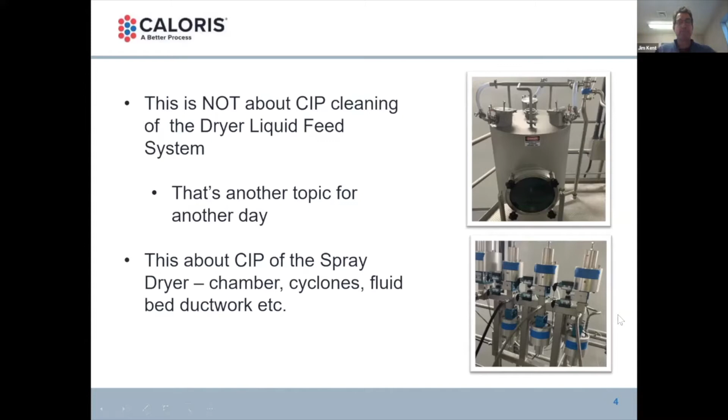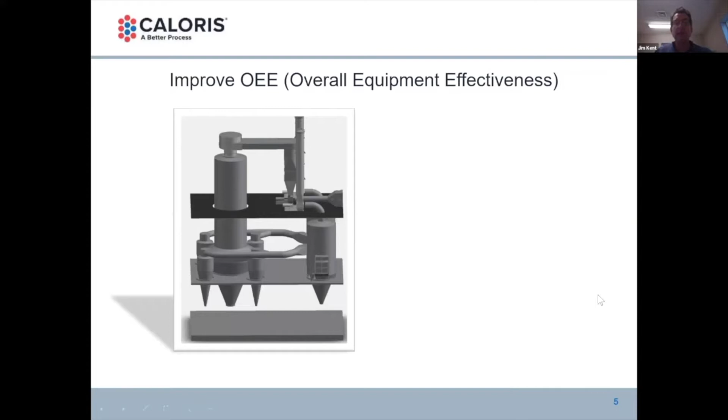All right, and the modern measurement of operational efficiency is OEE. So what are we trying to do? We're trying to improve OEE, overall equipment effectiveness. Missy, go ahead and click twice. Thank you. The two areas we're going to attack are: what can you do while you're running the dryer? What can you do between CIPs to make sure you're getting less buildup, so you don't need to CIP as frequently? And then, once you are in CIP, how can you shorten that? Missy, go ahead.

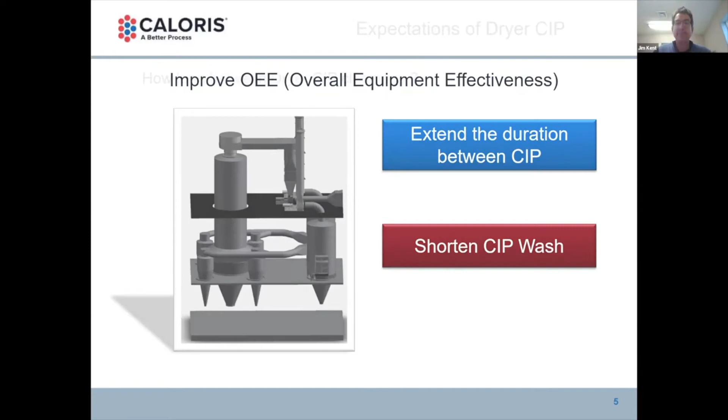So how long between dryer CIP cleanings? What can be your expectations of how long you could actually get? I looked at this in three ways, because different powders have different outcomes, different needs. So Missy, go ahead, click 3 times. I can just run through what comes here. I looked at it from a standpoint of commodity products. If you're running the same thing all the time, maybe a dairy product like a whey protein or a skim milk, maybe a plant protein, where you're running the same or a very narrow band of products all the time.

We might say a good target is 3 months. We're seeing a lot of spray dryers run maybe a year between CIPs. So if you're trying to set yourself a target to improve towards, we are seeing people maybe CIPing a commodity dryer every month, and they could try to extend to 3. We're seeing some that are getting to that 3-month edge, and they could strive to go for a year. What I'm trying to tell you is that the 90-day target, the year-long target is out there.

That is being achieved. And when you do that, what would be a reasonable duration for the CIP? How long would it take you from off product to on product again? If you're reaching that long target of a year, it's not unreasonable to think, if the CIP is working well, the machinery is working well, and the cleaning is effective, to get turned around in 12 to 36 hours.

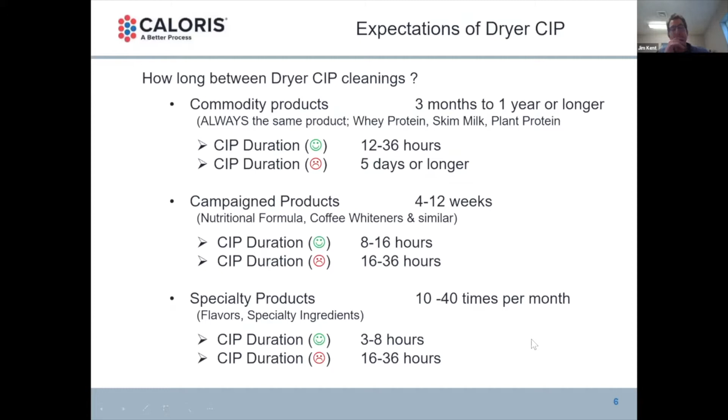Thank you. Missy, go on. All right, and click the next. And click the next, please.

All right. So when we're talking about OEE, overall equipment effectiveness, and we're trying to extend the duration of CIP, let's talk in terms of a commodity type product like we're showing. Let's say you're running 30 days, you're trying to extend to 60 days. And in that same regime, we want to shorten the wash. Let's say you're running 16 hours, we want to get it down to 8. What does that mean overall? Where does the opportunity lie in that? So Missy, one more click.

Well, what that means is you're right now 12 CIPs a year on a 30-day interval, 16 hours per CIP is 192 hours for CIP. You go from 30 days to 60 days and 16 hours down to 8 hours. Now you've reduced from 192 to 48 hours. So you've gained 140 something hours a year, nearly a week's worth of running hours or 2% of your year.

What's that worth to you? That's a rhetorical question only you can answer based on your product's value and your plant's economics. But what would you do? What would you spend or invest in equipment or training to gain an extra 140 hours of operating time per year? So next slide, please.

Next 2 clicks, please.

So now on the other end of the spectrum, like the specialty products. If you need to wash, you just need to wash. So if you were washing 10 times per month on a specialty like a flavors product, you're still going to wash 10 times per month. But what if you could reduce that? What if it was taking you 12 hours and now it takes you 6?

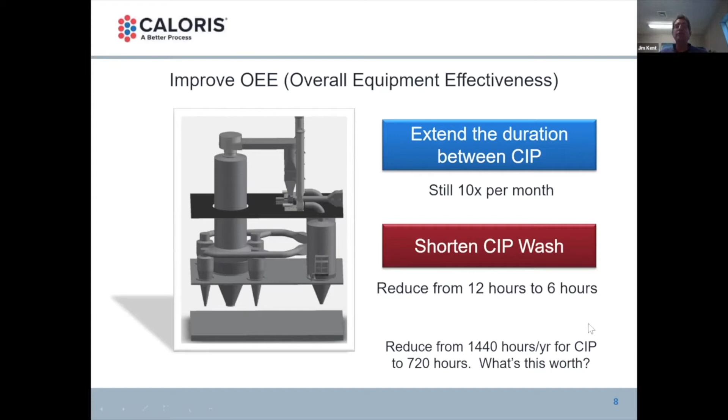Next click. So again, a little bit of my answer to that rhetorical question, because I don't know your exact operation, but if you're in that commodities arena and you're running 5,000 pounds an hour and you're getting that 140 extra hours per year because you've taken those steps, $1 a pound, is it profit? Is it net margin? Well, I think if you get a few extra pounds, most of that goes to the bottom line. Your overheads for your plant are covered.

So click, please. That adds up. 5,000 times $1 a pound times 140 hours a year, $700,000. That's the potential value, simply put, in capturing that extra time. And again, the question is, what would you do in procedures or procedure preparation or training or equipment to realize that extra operational potential? Next 2 clicks.

Same on the other end of the spectrum. If you were in that sort of specialty products, maybe it's a smaller dryer, 500 pounds per hour, but now you're talking about getting 700 hours per year. Now my $1 per pound is maybe a little conservative. These flavor products might have a net added value of $5 a pound or something like that. But at a conservative $1 a pound, again, $350,000 per year potentially captured in extra throughput of the plant, because you've improved the CIP.

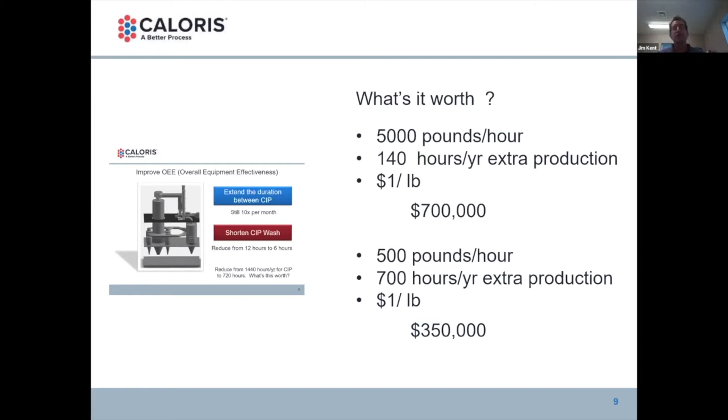So next slide, please. So again, one more or a couple more slides on background. 4 clicks total. One more. There we go. We'll hold on that.

Thank you. So why clean the dryer? There's actually 4 drivers in my view that sort of aggregate to be the reasons you clean your spray dryer. One big view on product quality, but different reasons for your finished product quality. The first could be discolored particles or burnt specks. If you're getting to that long end of the time, 3 months, 6 months, a year, your product in the chamber is going to be exposed to temperature and it might discolor. So that product quality visually with burnt specks might be a driver to clean your dryer.

Again, the flavors folks, the ingredients folks who are batching things, there might be product segregation issues, product separation, so colors or flavors. And nowadays, very strong view on allergen classes. In the US, we have 8 allergen classes. The EU defines 14 different classes of allergens. Could be a driver to do these CIPs so you get full segregation between your products. Obviously, biological contamination could be another one.

And spray dryer safety. So chamber buildup, whether it's burnt on, showing you hot spots, or you have layers of buildup, which could, in certain cases, depending on your product characteristics, auto-ignite and start a fire. We want to keep an eye on the chamber buildup, or cyclone buildup or other vessel buildup could be a driver to cause you to do a CIP. But these to me are sort of the drivers of why we need to clean and what makes that decision.

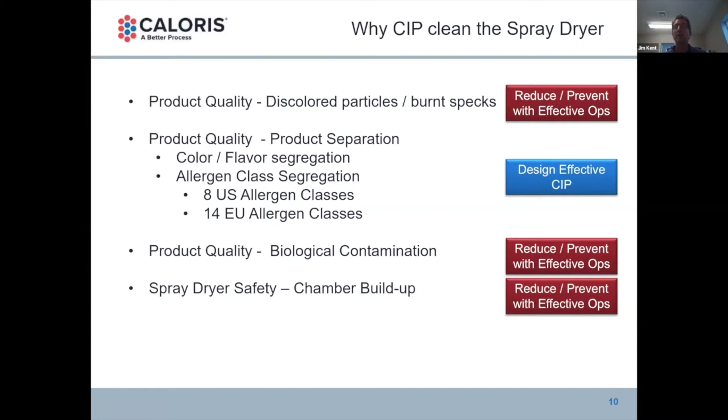Quick look, I just put it in here for reference, the 8 US allergen classes. A quick look up on the internet finds you these again, but these are the drivers for a lot of things these days that have to do with CIP, as these batched formulations with mixes of dairies and glutens and nuts become more prevalent. So next slide. So into the meat of this, what are common sense things we can do to extend the duration between dryer CIPs? Next slide.

All right. So one of the product quality things I mentioned previously was the buildup on the dryer, leading to burnt specks or biological contamination or safety concerns. What's causing those? How can we minimize them? Well, unsteady or irregular startups or shutdowns. So turning your dryer on, going from idle and spraying no product to spraying product, and then going from spraying product to shut down, so spraying no product.

That would be, I think, the single biggest potential time to create an upset condition that could wet the chamber down or heat the chamber up, dry it out, causing burnt specks, wetting it down, causing buildup. If the startup and shutdown can be done in the most repeatable way and the most controlled way, you have the easiest startup and therefore the least buildup, the least problems. So if we have unsteady irregular startups and shutdowns, I've put the little red unhappy face there.

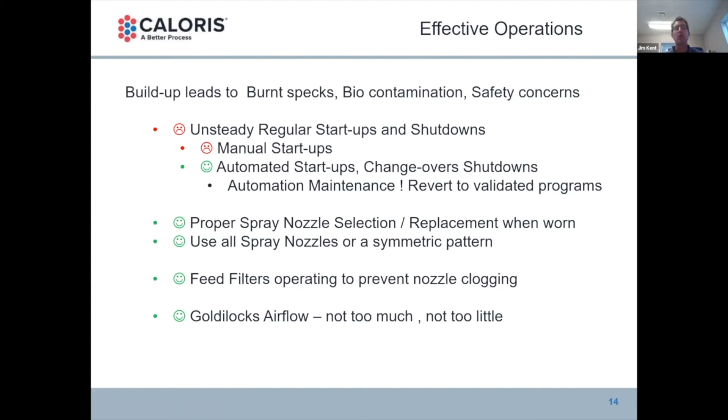Another topic I'll cover in another slide is, I'll call it Goldilocks airflow. Your dryer and its air disperser were designed for a certain airflow. Not too much, not too little. We can adjust temperatures, but we shouldn't be adjusting airflow rates. We want to maintain the Goldilocks airflow.

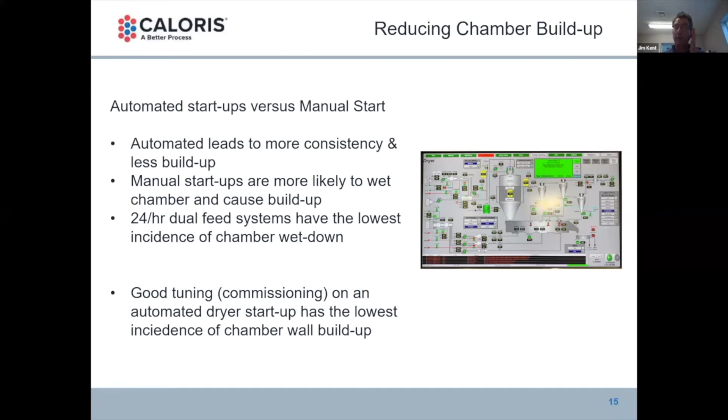I would say, as I said before, one of the more important things is that symmetric nozzle lance pattern. Let's use an example where you have 6 nozzle lances in there. If it's in startup and you're working your way, or today maybe you're only running 5 because you've got light solids or something like that.

One day is okay. But if you're consistently only running 5 when you have 6, it's time to consider whether you should be running a smaller nozzle orifice so you can run 6 and get the symmetric pattern that gives you even drying, even airflow, and eliminates the hot spots and the cold spots in your dryer.

As well, I've walked into dryers, and this is just fine, where they'll put 3 nozzle lances on one size orifice and 3 nozzle lances on another size orifice, so they can get a bit of a balance between 2 orifice sizes, perhaps. Well, you want to put them around evenly, large, small, large, small, large, small, as opposed to putting 3 large on one side and 3 small on the other.

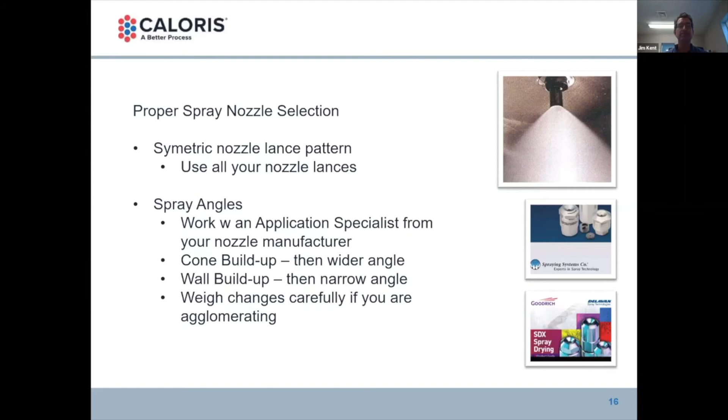Generally, if you have wall buildup, especially high in the chamber, then maybe you could do with a little bit narrower nozzle angle. Your swirl chamber inside of your nozzle would change in both those cases. But weigh these changes carefully. Your customers have gotten used to your product. Maybe it's an agglomerated product, whatever it is. Weigh the changes you make carefully. Do it scientifically. Note the changes you're making and then measure the product afterwards, measure the outcomes. So, Missy, next slide, please.

A couple of minutes on your air disperser. Any dryer manufacturer, whether that's Caloris or any of the others out there, has designed your air disperser to match the design airflow of your dryer. There is a velocity in the throat where the air enters the drying chamber around the nozzles. It's always best to be running at the design airflow, plus minus 10%. If you're running at that design airflow, you're going to get a correct differential pressure, and you're going to get a correct air distribution, a nice even airflow downward.

In my experience walking into some plants, they have a product, maybe they need less throughput on that product, and they'll reduce the airflow. Please don't reduce your dryer airflows to reduce your product throughput. Reduce your inlet temperature, and then balance your outlet temperature to get the product moisture. If you need to reduce throughput, don't do it with airflow.

The same to the other side. Be very careful about increasing airflows to increase throughput. It may be possible. It should be done by a specialist. One should always be concerned about spray dryer safety. But too much airflow could drive the product down deeper into the cone. You'll have a higher velocity. It'll push it down further into the cone and could increase your buildup. Your air disperser and your airflow were chosen by your dryer manufacturer for a reason.

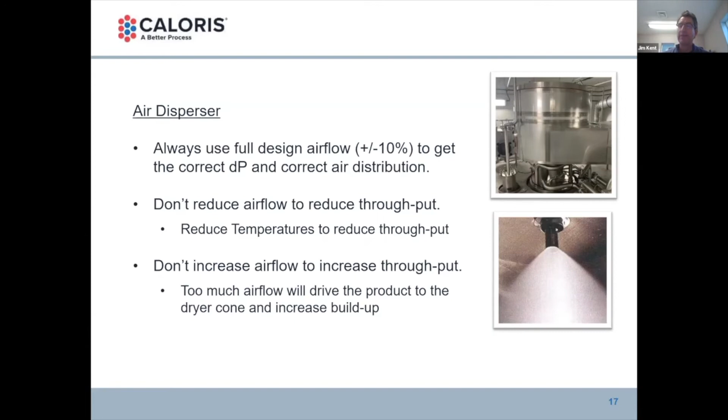All right, so that's some thoughts, not a comprehensive list of everything you can do to prevent buildup and extend the time between your CIPs, but some ideas and some areas that we see getting less attention than they should. So the last bit of this is shortening the dryer CIPs themselves. So let's go on to the next slide.

All right, the easy things. I feel bad putting this in here, but we want to make sure we say everything. If there's someone who this is new for, then I'm glad I've put this in here. So CIP is really, I'm thinking, from the minute you shut off your feed pumps and you stop spraying in your spray dryer, you're off product. You set your dryer up for CIP, you make some changeovers, then you do the CIP wash, then you change it back and set it up for production, and then you warm everything up, dry it out, and put it in production.

It's a little bit like that old metaphor, not fixing the roof of the house while it's raining. A lot of the things you can do to make for a good CIP can be done while you're running. You're going to do a CIP in 2 days or in 5 days, so make sure you have all those tools, all the swing connections, key pieces that you're going to need. And if it's been 3 months or a year since your last CIP, finding those tools, finding those pieces, and making sure everybody, including anybody hired since, understands the objective is sometimes forgotten in the heat of the moment of trying to get production through.

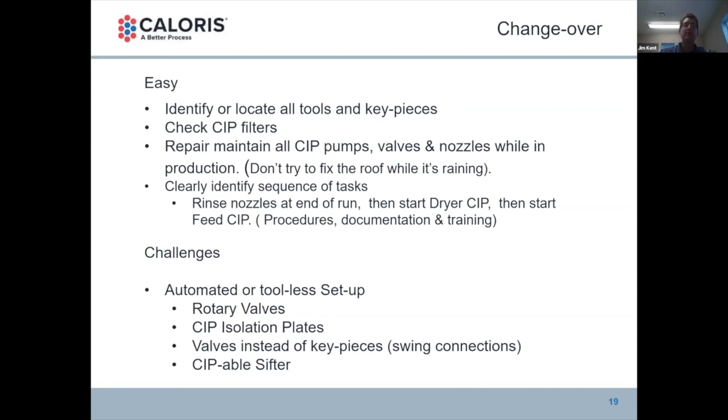Missy, go ahead. Thank you.

We just think at Caloris, with our experience with spray dryers, that there's a lot of time spent on manual installation of spray balls where there could be automatic deployment, and tens of hours per year could be recaptured for operation. It's a capital cost once, but it's a time cost with each CIP.

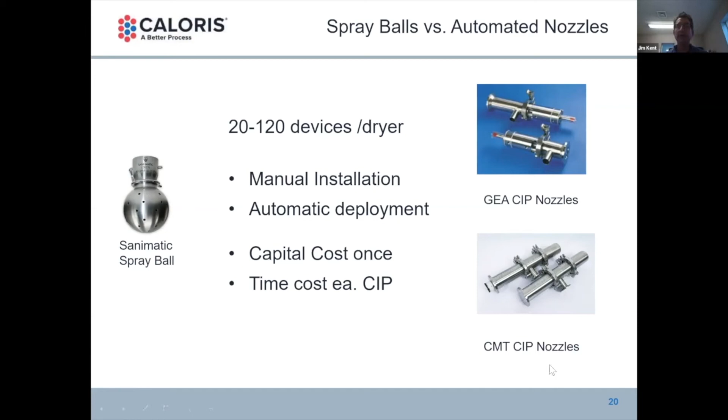Again, another area in the CIP kitchen: lots of spray dryers out there, especially the ones that CIP infrequently, where it makes sense to have a one-tank CIP system. So you fill the tank and you heat it up and you do a rinse, and then that's emptied, and then you fill it up again, and that takes some time, and then you heat it up again, and that takes another 30 minutes, and then you wash and you add some chemicals and you empty it out when that's done, and you go through your many cycles, losing a fair amount of time to filling, heating, and emptying. Extra hours are added in.

Now, if you only CIP once a year or once every 3 months, that's fine, but there's a lot of repurposed dryers. A dryer that was maybe a dairy dryer designed originally to CIP every 3 months, and now it's repurposed for something else. The one-tank CIP system is then a legacy item, and there are better ways to do it. Would adding a second tank save hours of filling and heating time?

The most modern way is a 4-tank CIP system, so that you might have a pre-rinse tank, a caustic wash tank, an acid wash tank, and a final rinse tank. If you have a site with multiple dryers, you could be washing multiple dryers with no queuing, having a 4-tank CIP system like this. If you're in the type of plant we talked about earlier, a flavors plant, where you're looking at turning around in the very fastest time possible, you're really trying to achieve that 4-hour CIP turnaround time from off product to on product, well, then this is an absolute necessity. High capital cost, but very much time savings.

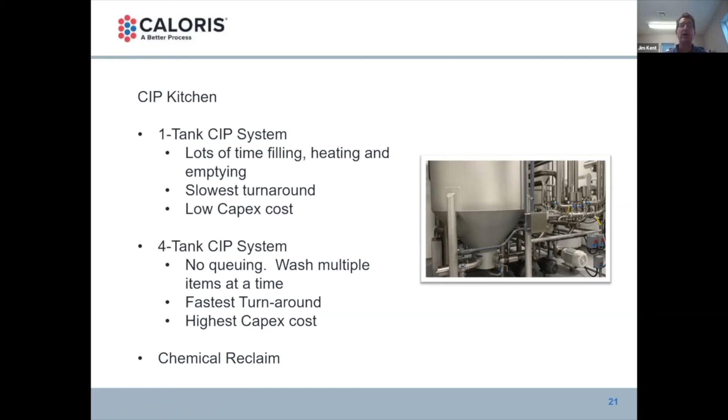Another area that can be looked at as one washes more often, as one has the potential 4-tank CIP system, is chemical reclaim. So cleaning up your caustic tanks. So if you're washing multiple times per week, you essentially have cleaner caustic with last week's washout gunk cleaned out of it, ready to go. So chemical reclaim is becoming much more cost effective these days, with the increasing price of chemicals and the decreasing price of the filtration necessary to do it.

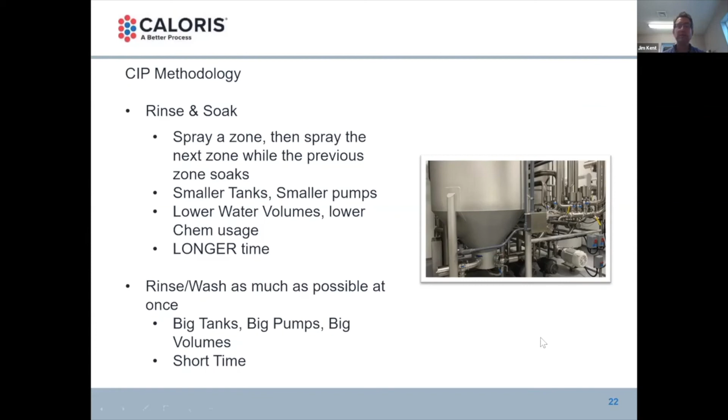So, last topic, a little bit of fun, lighter moment. Wanted dead or alive: the person who extends CIP timers and doesn't set them back. If I were in a plant every day, boy, I would give a bounty for that. Now, there's reasons to set CIP timers longer.

Oh, you've had a spray nozzle break this week, and you wet down the drying chamber. It has more buildup than normal. So let's make the caustic wash last an extra 30 minutes. But then nobody sets it back, and it becomes the new de facto standard. And the next time something happens, somebody sets a different timer, 30 minutes longer.

I can't tell you how many times Caloris and my colleagues have gone into plants where we know a particular set of steps in a CIP should take 4 hours, and we're finding that it takes 7. And when you ask the question, why does it take this long? Nobody can really answer it. They can say, oh, we used to do it in 4, and we set some timers longer, but we don't really know, and I wasn't on the shift then, and all the rest.

Again, this is what I said earlier about automation maintenance. Know your base program, know your base timers, not the programming that you need a specialist PLC programmer or HMI programmer to come in and do. Know the base set of timers. We do caustic wash on this dryer for 75 minutes, and then we do a 12-minute rinse, and then we do a 30-minute acid. Know that base program, just like you know your inlet temperatures and your outlet temperatures and how you run those things.

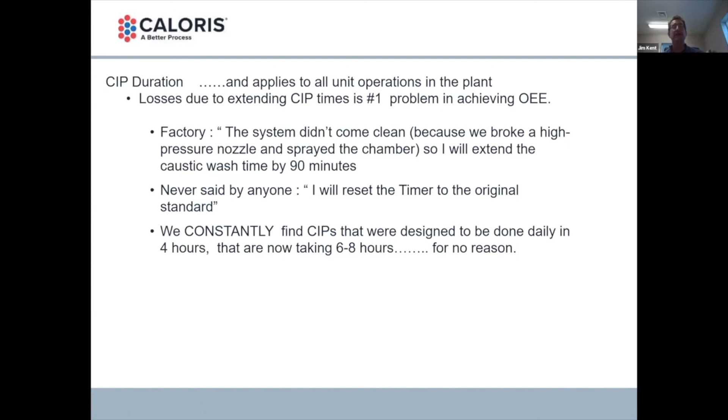So we're constantly finding these CIPs that were designed to be done in these lesser times, sequences. It's as true for evaporators as it is for dryers and membrane filtration and anywhere else in your plant. We're constantly coming in finding CIPs that should take 4 hours are now taking 6 hours, 8 hours, or longer for no reason that can be justified for the general CIP, for the average CIP. So click, please.

Again, we're also finding constantly poor maintenance on the CIP nozzles. So if you have these types of automated nozzles, the PM program, that preventative maintenance program that goes around and says, all right, we're gonna do CIP in a month. We're gonna start taking out nozzles, checking that they're unclogged, stroking them open, stroking them closed, seeing that they operate so that when we get to CIP, we can run the CIP as quickly as possible.

One could be doing that when one's doing the feed system CIP daily, just checking all of those nozzles, so that you're not doing it while the dryer's running. I know there's a hesitation to doing these sorts of things while the dryer's running, but checking of all of those CIP parts. Next slide, or next click, please.

And then another one that's become more and more prevalent: dry out steps. When I started in the industry now too many years ago, you finished a CIP and you turned the fans on, and as quickly as you could set the dryer up for production, maybe an hour with 2 or 3 people, the dryer would be dried out. It's in the name, it's a dryer. Sorry to be flip about that. But the dryer would be dried out. Maybe there's a drop here or a drop there of water, but it is dried out, and it is sanitary and hygienically dried out. But there has been a push to sanitize with heat more and more.